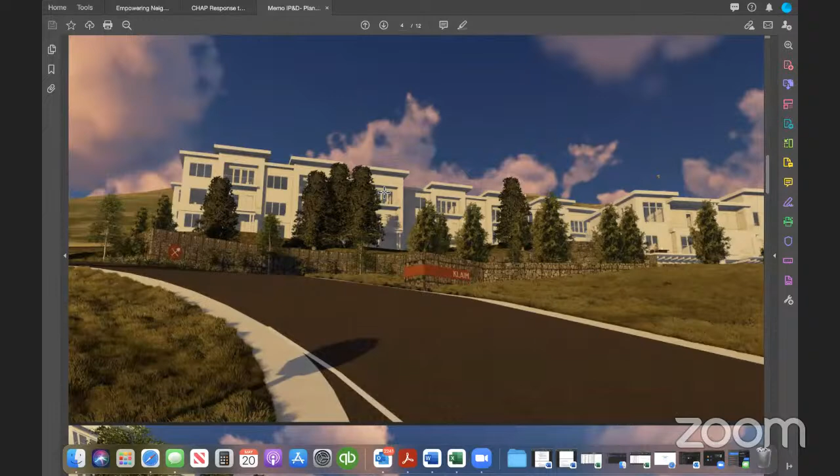If I come down here, it starts to get a little easier to see some of the proposal. So here you can see the signage out front. I think what they're proposing, I don't think Chris Ensign is on. I texted him, but I think this would be proposed as probably Corten, that kind of rusty metal, with a cutout for the Klaim, which is a nice design aesthetic. Again, the retaining walls would primarily line that entry driveway.

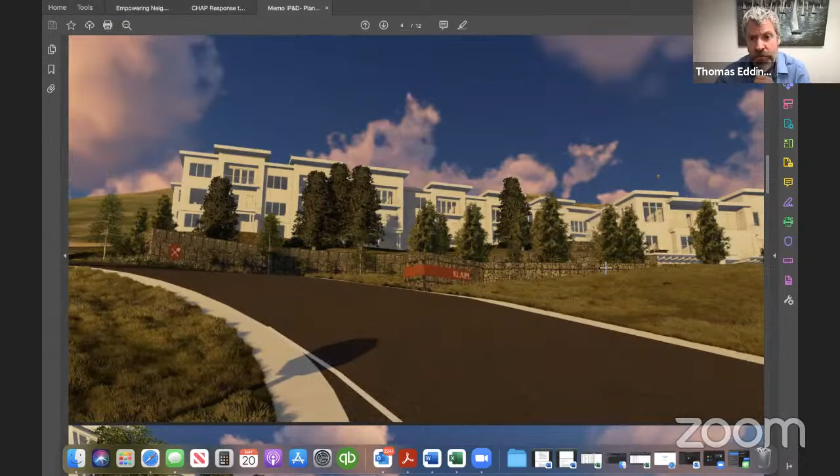We zoom in a little and take a couple different angles down here. You can see the driveway in, and you can see that landscaping, street trees, shrubs, and grasses have been incorporated to soften some of those corners. At the last meeting, a number of the planning commissioners had concerns about softening the harshness of the retaining wall.

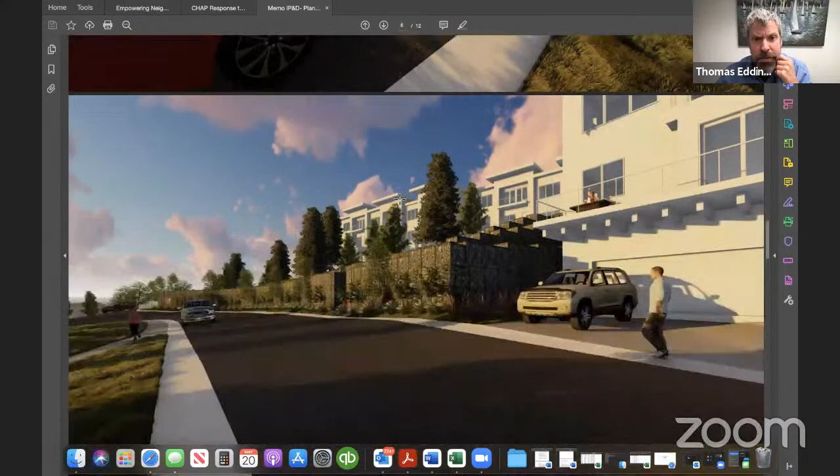Here's the other angle from the actual building looking out toward the entryway. Landscaping in front of the wall and incorporated up on top. Grasses would be in the actual terraced areas. We can't get trees in there due to roots and water, and you can see those grasses right along here.

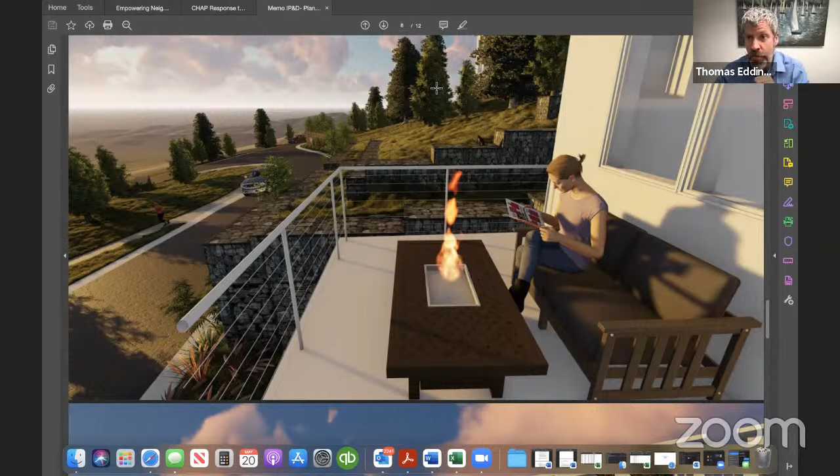We've been working closely with Chris Ensign, who is working with Seth Bachholt Landscape Architecture. They do great design work, and I think they've tried to address all of the concerns. Again, you can start to see the grasses here before it gets out of the retaining walls, where there will be additional landscaping to break up the height of the building, the mass, etc.

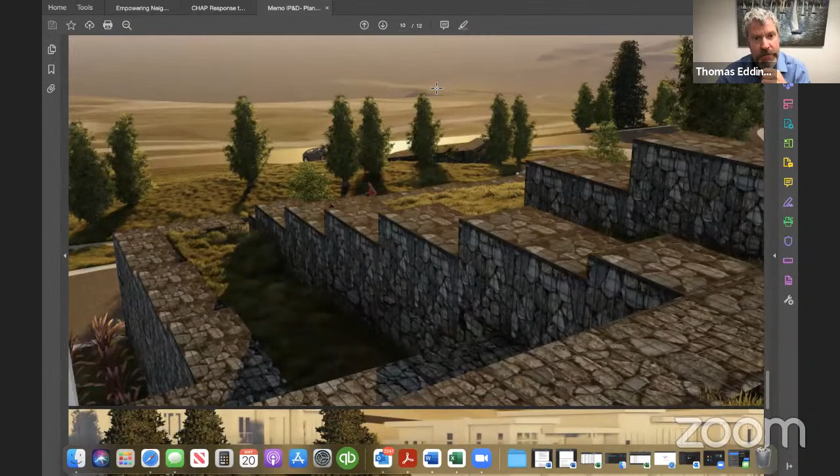I think this is the last couple. This is zoomed in a little on the sign, so you can see again the Corten metal sign, the Klaim logo, and another view of grasses in the retaining walls looking down, and then kind of an aerial bird's eye view of the retaining walls.

That's what we have. I don't know if you have any questions. I don't think Chris is on yet. He said he was going to try to join if there were any specific questions I can't answer, but I'm willing to take a shot at it based on what we presented.

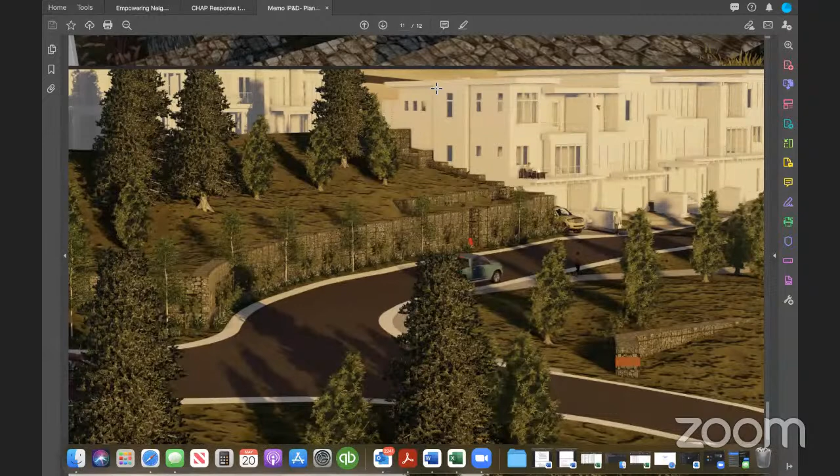Thomas, I have a question. Correct me if I'm wrong, Bruce, I think you were the one who raised the issue. I think for the most part, most of us had some concerns regarding that type of retaining wall and asked them to look at something else, only because of the way it was stacked in sort of those, for lack of a better term, almost like sleeves, you know? Right, and it just looks bundled, and it is by design, it is kind of a bundled concept.

It's those gabion baskets, that metal basket, with natural rock incorporated inside. I don't think Ryan is on either. When I initially went out there, I had some concerns about the starkness, the modern characteristic of the walls as well. When we started working with the site engineers, IGES and Ryan's team, they felt the gabion basket had a bit more structural integrity rather than just stacking rocks. So we tried to work within that framework and soften it up. We did go back and look at opportunities to return to stacked rock, but I think from a structural integrity standpoint, the engineers felt this was a better option.

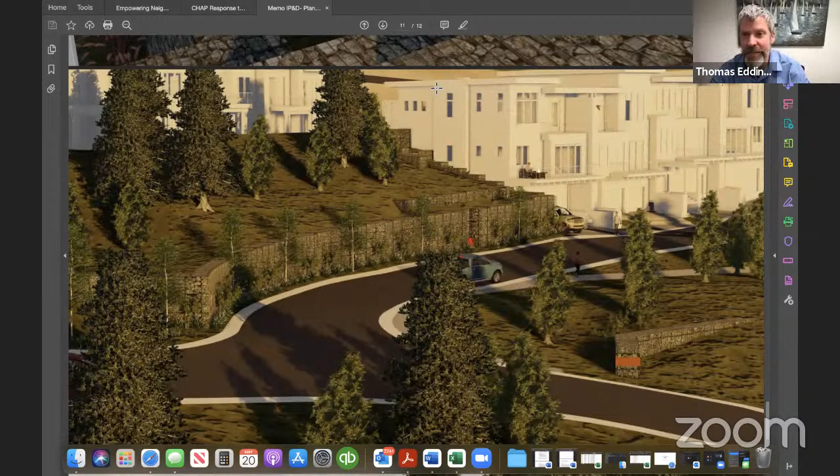They had done a lot more analysis on this option, given the height of the walls and this terracing. So from a health, safety, welfare perspective, we started to lean this direction and work closely with the applicant to get a landscape architect to bring in some opportunities to soften the walls - the grasses, trees, et cetera - so that they didn't look as stark as they do right now, and they will before the landscaping is installed. So that's kind of where we landed.

The height of the walls - how high are some of the walls, Thomas? I don't have exact measurements, but this wall right here, probably one of the higher walls, near the condo building looking down the entry road - this one's probably... 6 feet. Oh no, I bet it's 8 to 10 feet. I think it's closer to 10. Yeah, if I were to stand right next to it, I bet I'd be close to right around this line. So those are about 10 feet.

Keep in mind, these walls were approved under the prior code, so we don't have the limits that are in the current code.

I like these walls myself. I know Bruce, you didn't, but I like them. My concern actually with the ones that we have all around us now - somebody pointed out to Donna and I that the ones out there now are using natural stone and it's starting to fall apart. So I think these might actually be better.

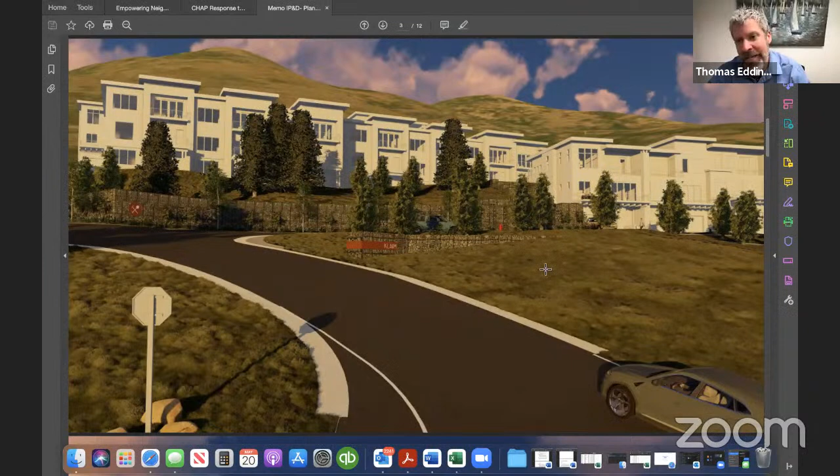It's interesting that you say that, because early on I did look at these and at first I thought, ooh, a little stark, a little modern - I have to be honest. But once I worked with Ryan and the engineers, they validated what you're saying, that these are more structurally sound, with better structural integrity. They've also done a lot more analysis on these particular walls than on the stacked walls. So once that was the issue - taking into account health, safety, welfare, balancing that with design and aesthetics - that's when we went back to the landscape architect and really tried to soften these and get them to mesh a little more with the natural landscape. But yeah, I think the engineers would support what you're saying.

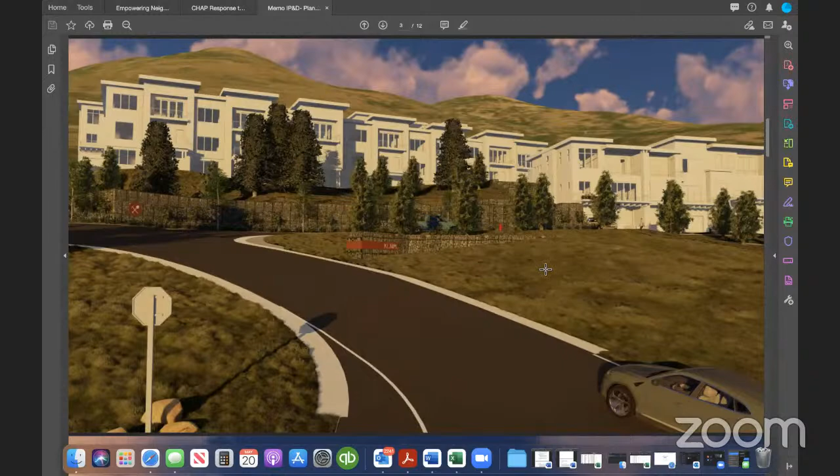Thomas, correct me if I'm wrong, but with the picture you showed us where it's about 10 feet high, they can't plant anything in front of those to soften them, can they? Because that's a walkway. No, they can plant - they're proposing to plant in front of those. That is what they are proposing.

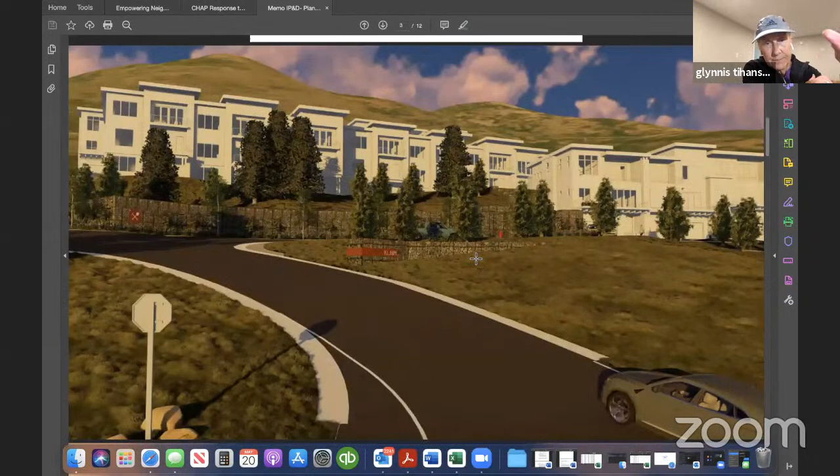So was that ever a walkway? I don't know that was ever proposed to be a walkway. It's not to say maybe we can't get some rock or weave a little walkway in there, but they are proposing to put plants and try to get some columnar trees in there as well, just to soften them. I did notice, if you scroll down, on the other side of the street there's a walkway - you can see the start of it by the sign. Let me see if I can find that image. Oh, there you go - so there's a sidewalk on the other side of the street, and then it crosses over up there, I guess.

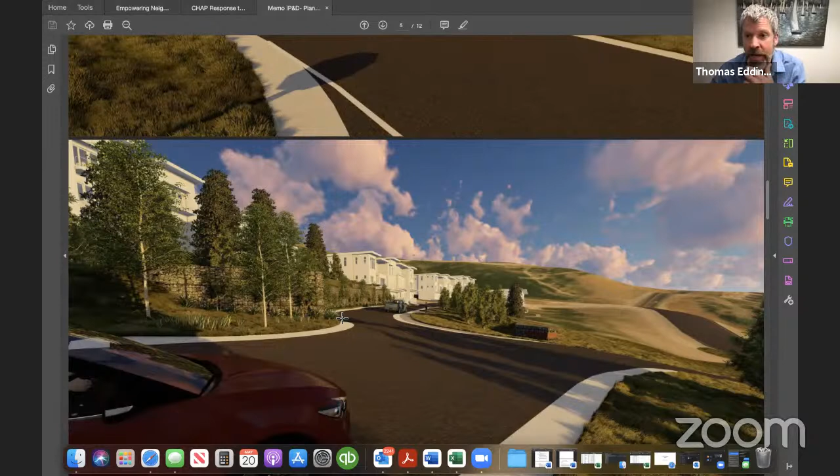That might have been a change actually, because I think initially, a couple months ago when we were working with Chris Ensign, we were thinking about trying to get trees in there to break up the harshness of the walls, and maybe weave a path in there. So maybe this has been a revision, and then there's a crossing up there, which is actually kind of a nice touch. Is that walkway on a plan anywhere, or is it just on this picture?

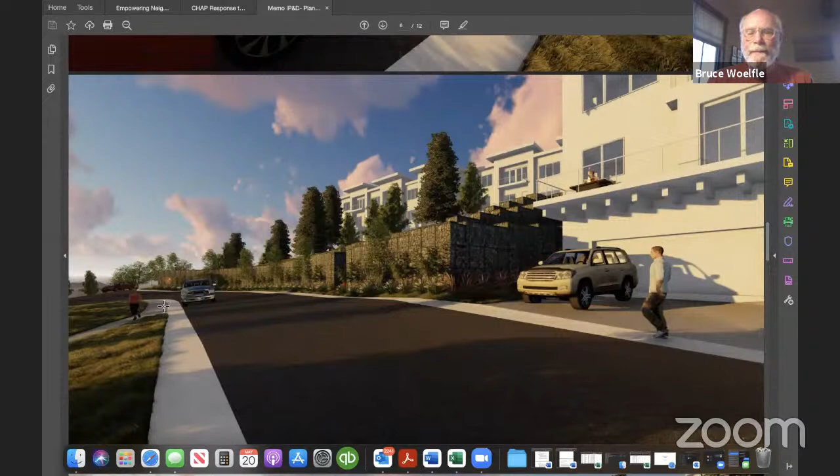Because this picture isn't really representing what it's going to look like, since they can't plant trees on the top. Well, actually, they can plant trees on the top - they can't plant them in the terracing. These trees are all in front of the building, not in the terracing area. The terracing is right back here.

Once the walls stop and they get back to stable ground, they can plant trees. Where they cannot plant trees is kind of right in this area here. They can't plant them between the two walls where it's terraced.

My question, Thomas, I don't know if you can answer this, but those baskets are, I think, a little misrepresenting in these pictures. I think they look much better here because they're showing a larger rock than what's actually in there. And a concern is what's behind these walls so the soil doesn't leach through and disappear over time. Is there some sort of barrier behind the wall, or is it just these baskets which the soil can percolate through eventually?

No, I think that there is a barrier. In fact, if you wanted, I could text Ryan real quickly, because I know that he and his team did a pretty thorough analysis. I don't have that detailed analysis, that was done between the last meeting and this meeting, but I could ask him. My understanding is typically these walls are built with a structural membrane behind the actual rock that is in the gabion basket, so the soil doesn't leach through.